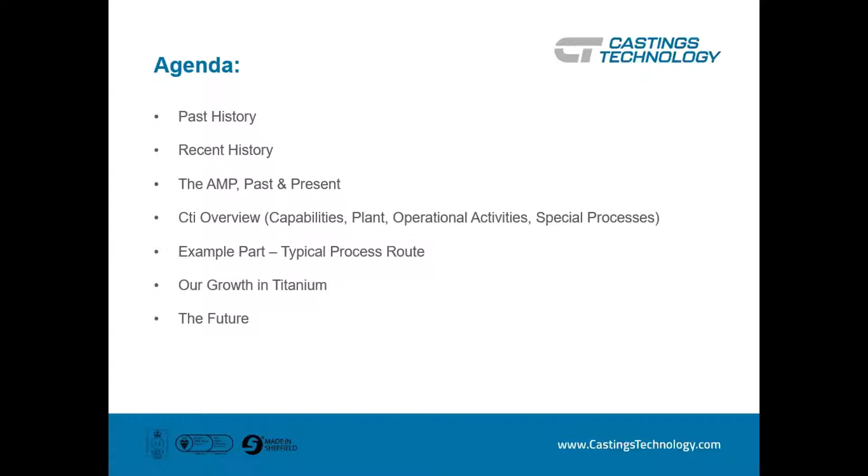Good evening, everybody. I'd just like to say to the organisation, thank you very much for the invitation. I've been asked to talk about Castings Technology International, a company that has a rich heritage, past, present, and future. We'll look at the past history, some more recent history, and then ultimately what we're doing at the moment, and what we hope to be doing in the future. I'll try and weave into that a little bit of discussion around the MBO process that took place in January of this year.

After both world wars, the government had a desire to promote and support the casting industry. After the First World War, cast iron in particular was a growing commodity, and the BCIRA was formed in 1923. Subsequently, after World War II, where steel was becoming much more prevalent, the Steel Casting Research and Trade Association was formed, otherwise known as SCRATA, in 1953.

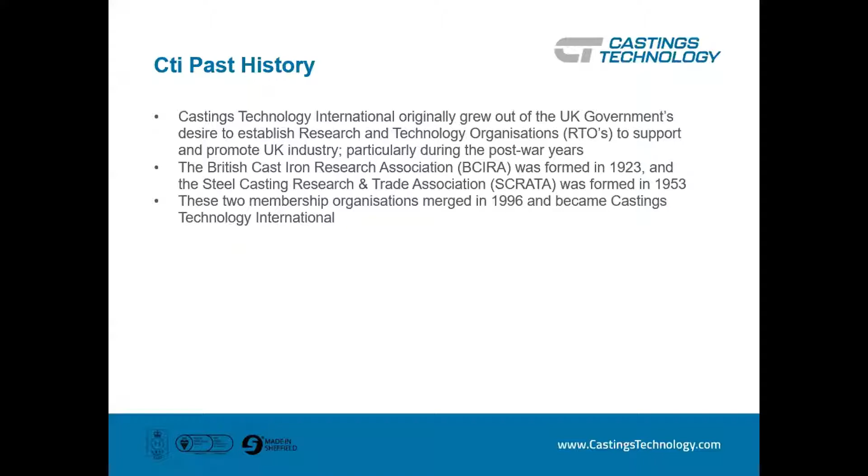Those two organisations ultimately merged together to form what became Castings Technology International. In 2006, the majority of CTI, as I'll use the acronym, moved to the Advanced Manufacturing Park at Catcliffe. For those of you who aren't local, I suspect most of you are, that's near Morrison's, just off the Sheffield Parkway, which is how it tends to get routed in the absence of sat-nav.

So when I say the majority of the operations, there was a subsequent move, which I'll come to in a second. But in August of 2013, the AMRC, or Advanced Manufacturing Research Centre, was pursuing three particular threads of manufacturing. Their expertise was in subtractive manufacturing, so what we would call machining as engineers. I'll come clean now and say all of my background is machining, so if the metallurgists would go really easy on me tonight, I'd be grateful.

I only really got to explore the world of castings from about 2014 when I joined the business. So in July, August 2013, the University of Sheffield bought CTI, and they did that because the next natural progression from subtractive processes like machining is to get near net shape, particularly when it comes to aircraft structural parts, where you might start with a block of aluminium of significant weight and turn 90% of it into swarf to create a matrix for a wing or fuselage section. They got very, very good at the machining side.

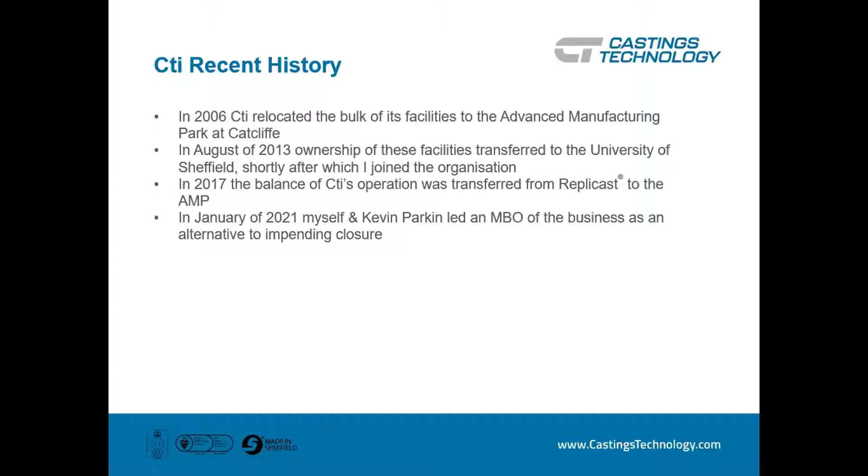At this stage, I always like to pause and reflect on us moving up to the Advanced Manufacturing Park and what that really means to the local region. As a regular visitor to the Sheffield area as a youngster, even though I'm a Midlander, more specifically God's County of Leicestershire, it always amazes me what the landscape looked like around Orgreave and Catcliffe at that period in time. This is just after the coking plant had closed and become slightly derelict.

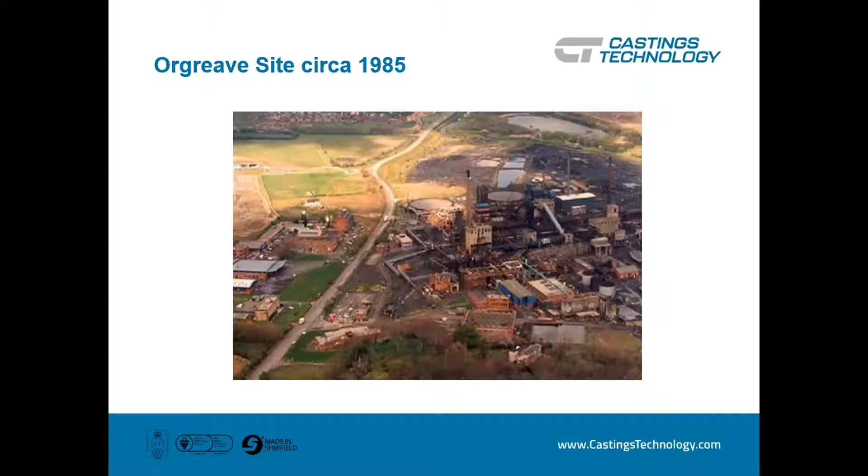And then in contrast with that, just a few short decades later - this is an artist's impression back in 2018, and nearly all of this has happened in that time scale. You'll see our two buildings just beside the very large windmill there. I'm sure there's a pointer, but I'll use my finger - that's our number 1 building, and that's our number 2 building.

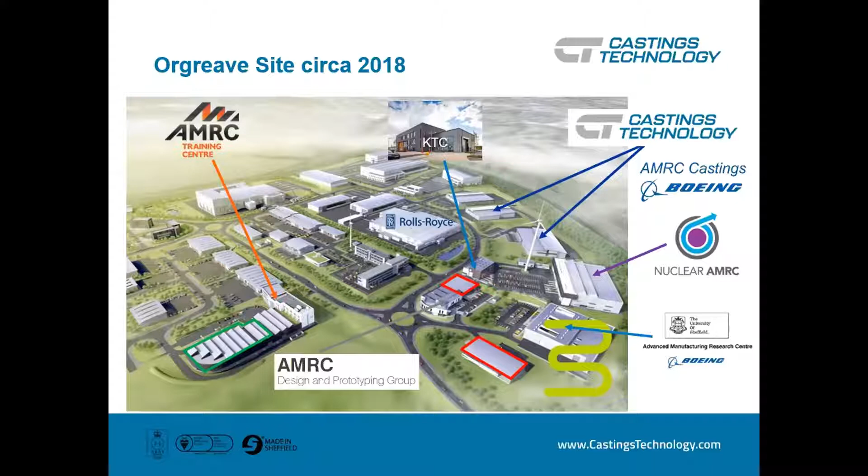It's not recent enough to have McLaren on there, which is just around the corner, and some great names including Rolls-Royce and so on. Just across the other side of the parkway, we attracted Boeing's only manufacturing facility outside of North America as well. So the transformation created by the Advanced Manufacturing Park is tremendous, and it's great to be on there, I have to say.

So what about CTI? I'm just going to give you a brief overview, then hone down into some of the processes. We have around 80 highly qualified engineers, ranging from very skilled operators through to people doing administrative support tasks and engineering in the background.

And we have, for a relatively small business, a very large global footprint. We have a licensee who has exclusivity in China, and a licensee who has exclusivity in India. We also have members throughout the world, and at the moment we're partnering with about 115 members. So we still retain that members feel to the organization, even though commercially we've branched out from that.

The reason I put up the graphic about MRL, TRL - a popular Department of Defense rationalization of manufacturing processes - is that what set us apart within the AMRC when we were still part of the university is that they focus very heavily in 1 to 6, getting to pre-production is where their expertise is. However, CTI go throughout the entire range from 1 to 9. So we can do blue sky R&D, development of new alloys and so on, all the way through to going into established processes in large foundries and optimizing the process further.

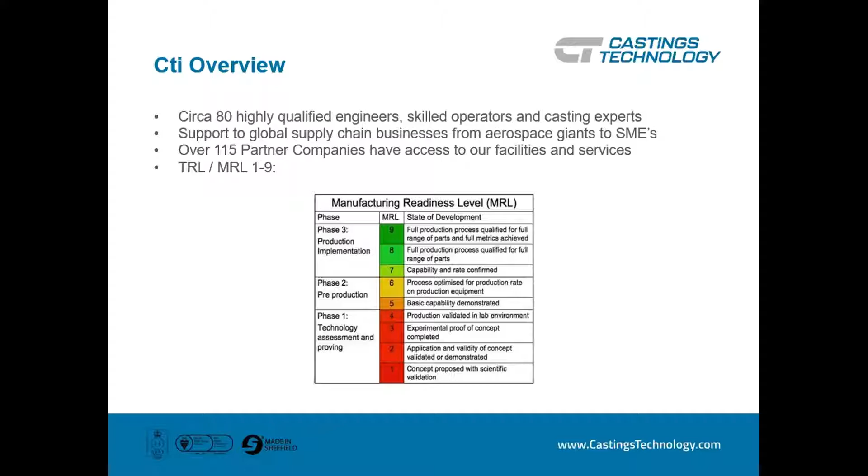So we do a broad range of services. In terms of what we do in the building, plant and equipment, I'm not going to go through this line by line because you're quite capable of reading it off the slide. But I think the important thing is we still use traditional pattern making skills. We have guys every day making patterns using wood, foam, generally low melting point materials for the patterns, but then an awful lot of wood for the feeding and gating systems and so on. The materials are obviously selected to suit the most appropriate ones for the process.

We're going to focus this presentation around ceramic shell casting. So ceramic shell manufacture is probably one of our most critical processes. We also have heat treatment furnaces, melting furnaces - so we have the whole gambit. We have quite a high level of vertical integration, so we don't have to subcontract too much work out.

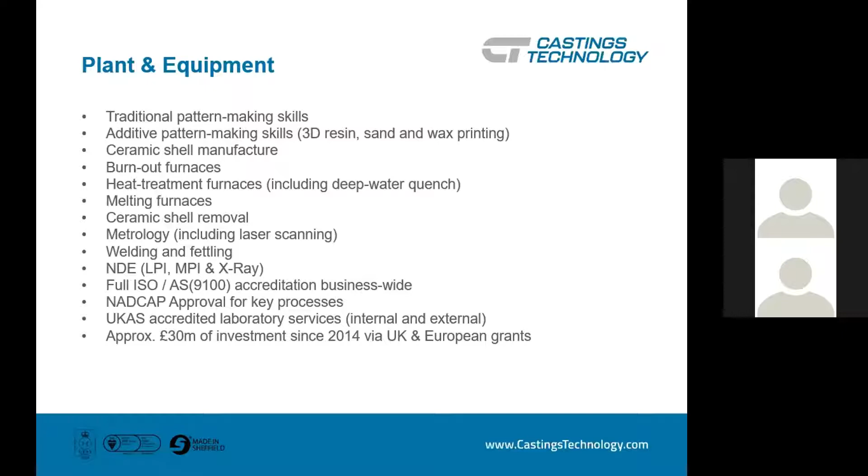The exceptions being chemical milling, which is a pretty unpleasant process that we don't really want on site, involving neat hydrofluoric acid, and also hipping - hot isostatic pressing - for which the capital requirements are huge, and we don't have the space for a hip vessel unfortunately. But as you can see, we've got a whole host of both traditional foundry practices and also some less traditional ones. Some great approvals there too.

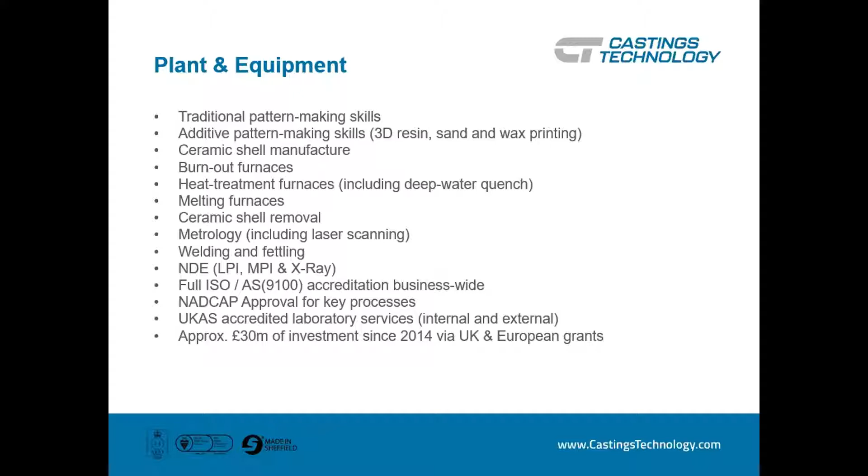We have a full ISO and AS 9100 accreditation. On key processes we also have NADCAP approval, and our lab is UKAS accredited. I think it's quite important to take in that last line - between the university taking ownership of CTI in August of 2013 and the MBO, there was an investment of around £30 million of public money into the business, into the facilities and equipment, and some of that you'll see in photographic form in the presentation.

So, some of our activities - we'll come back to the breadth of what we offer. We do make castings; we quite like making castings, and we like to think we're quite good at it. But we're not precious about casting, because there are other services we can offer that are good for UK PLC in particular, but also for overseas advancement of casting technologies. So we offer consultancy, we offer design for casting manufacture support, and a whole host of other things in addition to series production of castings.

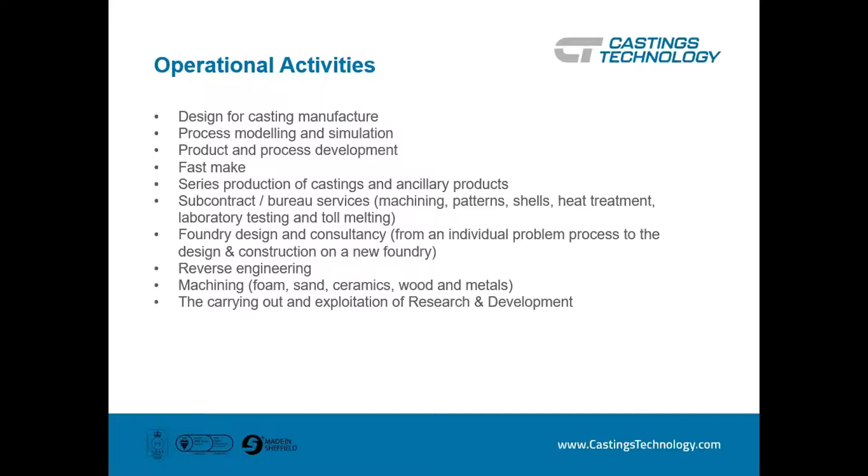And as I mentioned, all the way through the gamut from carrying out research and development, the important thing for us as a business is we can exploit it. It's not just about doing some research and development that sits as a paper somewhere, all very nice. What we can do is take it to market as well. That's one of the key reasons we stayed with the AMRC for so long. So these things tend to set us apart.

I've already mentioned the breadth of offering. We also have 3 primary casting processes within the facilities. One, investment, and the reason I put an asterisk by investment is, for the purists, we don't do investment casting, because investment casting goes into a hot ceramic shell, and everything we do pretty much goes into a cold ceramic shell. And when I say cold shell, usually the next question I get is, you don't really mean cold, do you? You have a heater on, it'll be a few hundred degrees. No, we mean room temperature cold, and that goes for titanium as well as the other metals that we melt. We have, unusually for a foundry, a whole wide range of materials.

We're the UK's only titanium foundry, but we also melt aluminium. We do all the steels through stainless to super duplex. We occasionally do iron. One of the few materials we don't do is magnesium, we subcontract that out. But whether it's light alloys, nickel-based alloys, titanium, we cover a wide range of materials.

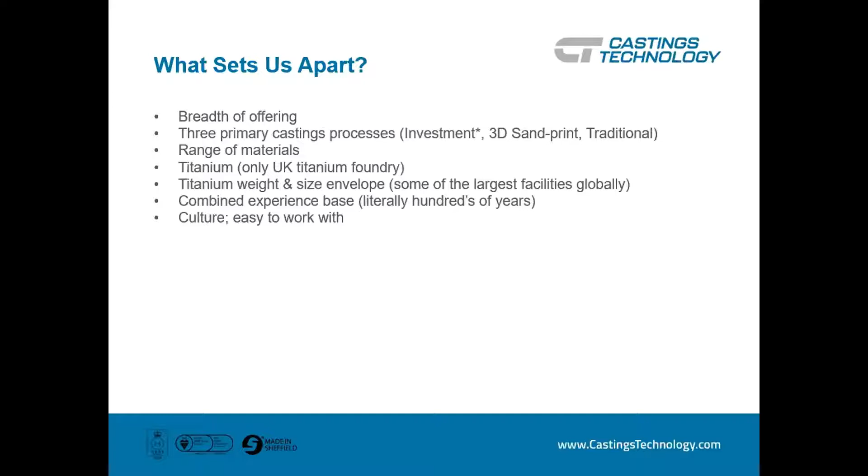You might think the last bullet point is a bit of an odd thing to say. We have a culture that we're quite easy to work with. Strangely, in the foundry sector, being easy to work with is not a primary concern of a lot of the foundries I've come into contact with, and certainly not when it comes to high-end titanium, which is generally controlled by 2 or 3 North American companies. So we set ourselves apart to be very, very easy to work with.

As you can see, our process generally uses a single pattern. In a normal traditional pattern process, you'll have a wooden pattern, ram sand, press that shape in, and you'll probably have a core box and be fitting numerous parts in. With every one of those parts, there's an accumulation of tolerance and so on. We don't have any of that. We print the pattern, usually in 3D, or machine it in foam, and it's a single piece. Why that's important we'll come back to a bit later on, but what I'd like us to think about is it's not just the accuracy of that part in terms of tolerancing, it's the geometrical relationship between those vanes that's consistent, very accurate, and the blade form's very good.

So it wouldn't be the first time that people have bought impellers using old empirical data that have broken the pump casing because it's over pressurizing the pump case. It really does change the hydrodynamic performance of rotating parts.

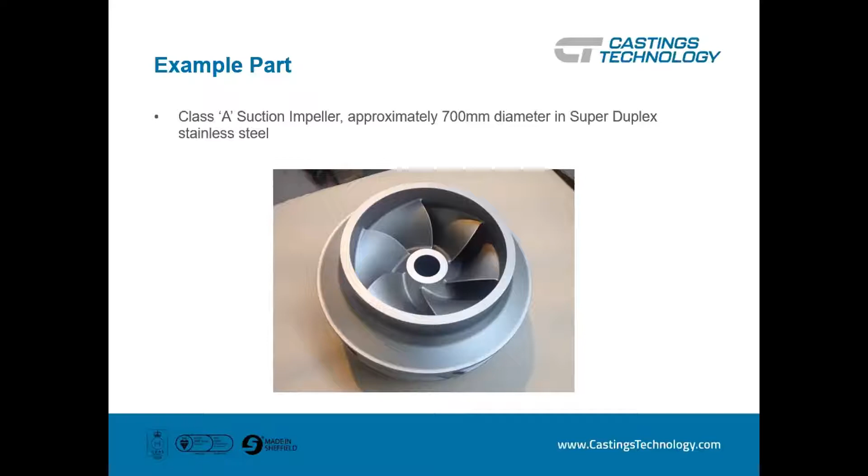So this is the part that we're going to run through in terms of some of the things we do. That's what they look like when they've been finished, machined. As you can see, a lot of these parts that you saw on the other picture, looking around the periphery, are as cast. It's just the outer surfaces where it has to mate with other parts that are machined.

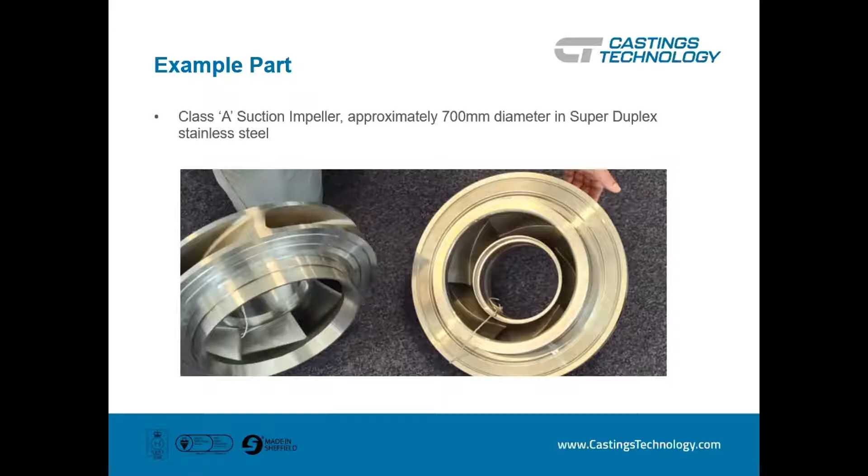So we utilize 3D solid modeling, as a lot of companies do nowadays. We don't generally get involved in physically designing a product from scratch. What we do often get involved with is consultancy on design for casting manufacture. Because of casting's legacy, there's probably a whole generation of engineers who've come through and been told that casting's a bit suboptimal as a process, which is slightly unfair, particularly given the advances. But there's still a tendency to design with a machining or fabrication mindset.

And what we do need sometimes to discuss with the design authority is what sort of corner radii. If we can increase the corner radii, we reduce the opportunity for a crack, and so on and so forth. Very basic stuff, offsetting webs so that we don't create an isolation in the design. And using 3D modeling for that is a real bonus.

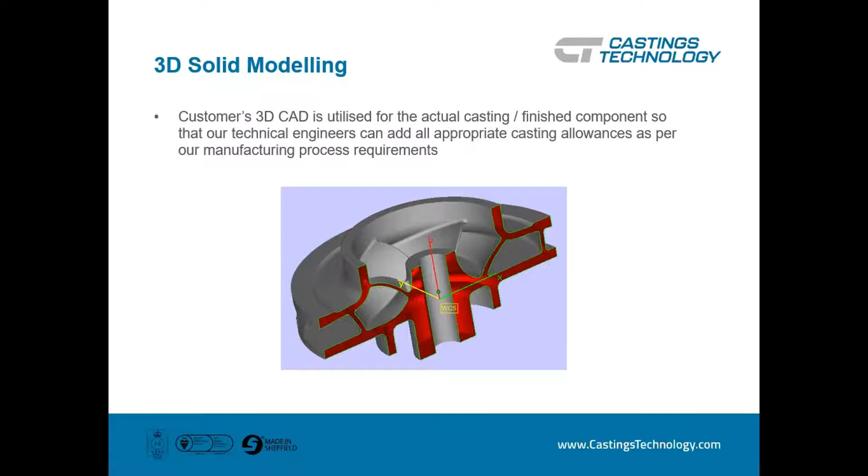I would say 90% of what we do these days comes to us first as an inquiry with a 3D model. Then what we do, we often make one-offs in small quantities. Now, I don't know about any of you guys, but I did my apprenticeship being told that unless you've got 1,000 to make, don't even consider casting as a process. But we do an awful lot of one-offs. Our average batch size will be around 2 or 3.

And even where we do volume, we've got a contract on F-35, the Joint Strike Fighter at the moment, and we're making 40 parts a month for that, but there are 9 part numbers, so it's still relatively low volume for each individual component. But what we do have to do when we have so few parts to go at...

...is to do as much upfront simulation in the digital world as we can. So all of the castings we make have a full process simulation carried out, sometimes prior to quotation. It really depends on the type of part. And we'll almost always run a fill and solidification simulation as well. It's surprisingly accurate. We wish that we could go one step further and model the shell as well for its dilation and propensity to crack, but unfortunately that technology doesn't exist at the moment.

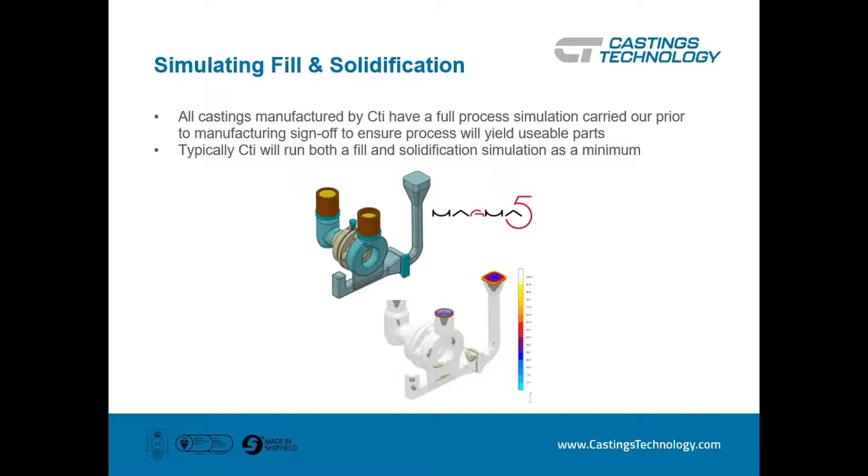Then what we're going to do, depending on the geometry of the part - and this very much suits the photograph that I put up at the beginning - we're going to make a pattern or a replica, hence Replicast, of the part that we want to make. And that's very traditional in investment casting.

But what we do need is a good low melting point material that's going to give us a reasonable surface finish. So foam tends to be entry level. We machine foam. Some of the limitations of foam are surface finish, although we can wax the outside to help with that. But also, remember, we're machining foam, so we can only make shapes that you can machine on a multi-axis machining center.

Whereas with SLA, we're building these patterns in layers, and these are known as quick cast patterns. And if you don't know...

It's Yorkshire, the resin's expensive, so we don't like to use very much of it. But joking apart, what happens is if we create this in a solid resin, put it in a ceramic shell, and then try and fire it to burn it out in an oven, the first thing it will do is expand, and that cracks the shell.

So what we actually create here, although it looks solid, inside is a honeycomb pattern. That reduces the amount of resin that we use. It also, when that's exposed to 1,000 Celsius, tends to crumple in on itself. There's lots and lots of trapped oxygen, and it helps to burn it out. We don't want any ash or waste left in there. And that allows us to create a really good replica of the part with a little bit of contraction allowance on it.

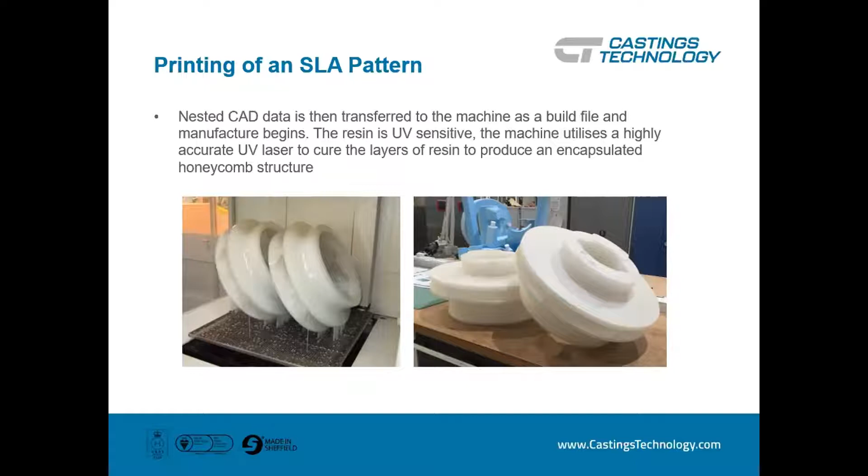So that is our go-to process for low volume, high integrity Class A impellers. It's a very expensive process, by the way, but very, very good at what it does.

Having done that, we're going to put that in a cage - whether it's SLA, foam or wax, whatever the low melting point replica is made of, they are quite fragile. Then we're going to add ceramic to it, which is not known for its robustness and toughness. So we put everything into a standard cage. We have a range of standard cage sizes, and we're going to create that ceramic shell.

That's made up of a number of layers, alternating between wet ceramic slurry and dry granulate ceramic. In between each of those coats, there's a drying cycle - not firing anything, it's literally about 25 Celsius, a warm, low humidity environment. Because what we want to do is avoid any wetting back. You put a wet coat onto some plaster or ceramic and it's likely to soak in.

We want to draw the water out, so that's relatively low temperature. And that might be up to 30 coats. It all depends on the material type and the geometry.

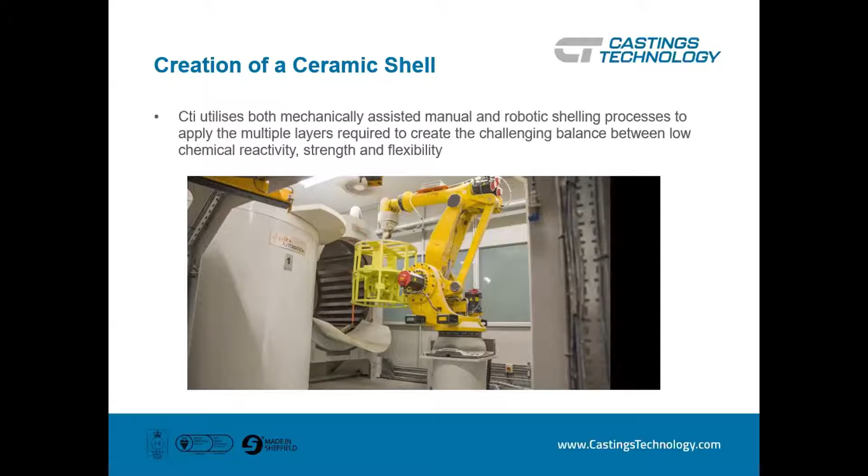And that leaves us eventually with a ceramic shell that looks a little like this. This is the best photograph I could get today because the only thing I was missing was the shell. It's had a section cut out of it, but you get the general idea of the relative thickness of the ceramic, and balancing that, as I'll mention in a moment, is really, really important.

The reason that's blue inside is that the prime coat, which is the first coat you put on the model, is the most important one. It's the most expensive - it's the KFC recipe that nobody gets to know about, because that's where all the technology is. That's the coat that's going to see the incoming metal stream, which is going to be significantly hotter and heavier, as it splashes into the shell.

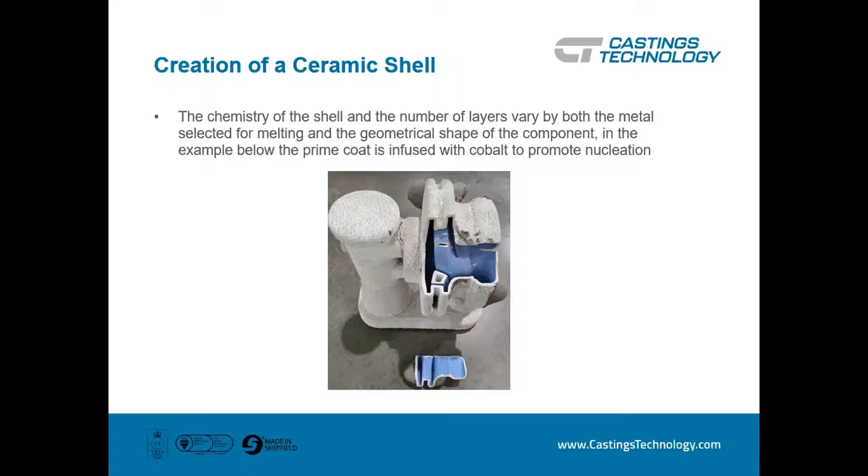This particular one is blue because it has cobalt in it. Cobalt helps to promote nucleation on certain materials, but it gives you an idea of what a ceramic shell actually looks like. And then we're going to melt and pour.

In this case, I picked on atmospheric melting because the part, as described, is super duplex. We melt that generally in atmosphere, depending on the specification. And we have a relatively modest melting capacity for steel. We have 3 furnaces, so we're able to make a range of parts without melting too much material.

They're on a single electrical track, so we can melt all 3 at the same time and create around about 3 tons of molten material. Now, because our yield using this process is relatively low, that will give us a finished casting of around a ton and a quarter, something like that. The rest of that material is part of the process - it gets cut off, it goes back into the process and gets recycled, like most metals do, but the yield is relatively low on this process.

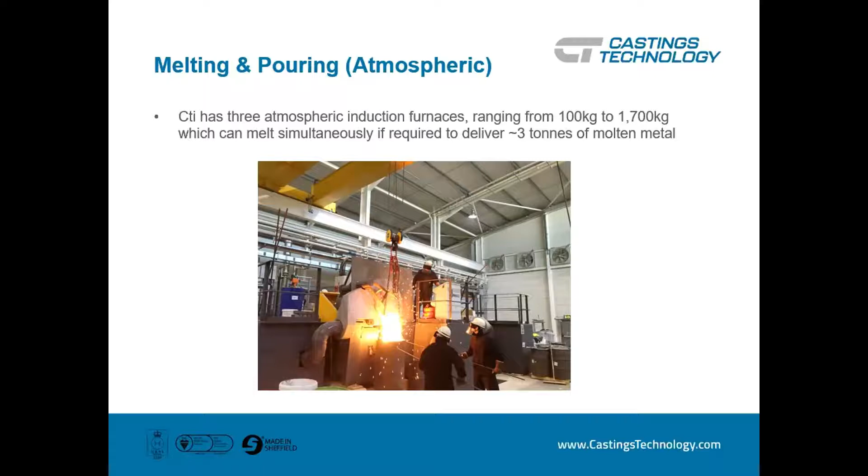And then you may well ask yourself, well, that ceramic shell is at room temperature. We're bringing steel into it probably around 1600, somewhere depending on the spec, 15 to 1600 Celsius. We're going to bring it down in a down sprue. We're going to fill that ceramic shell quite quickly - 25, 30 seconds - with maybe up to 3 tons of molten metal, and you're going to elevate its temperature almost instantaneously to around 1600 Celsius.

And it would be naive to expect the shell to survive that on its own. So outlined on this particular photo is the Replicast box down at the bottom here, and you'll see a number of vents and also the down sprue. What we do there is we put the shell in its entirety inside a steel box. We surround it with standard silica sand, nothing special about the sand.

What is special about the process is we then put a sheet of plastic across the top. We connect the box to a liquid ring vacuum pump. And if you've never done this experiment, if you do that, you find that the sand solidifies. So I missed out an operation which is vibrating the sand - we keep settling it like you would with a salt pot. And when it's settled to a certain frequency and time, we then pull a vacuum through it. We used to do it at exhibitions, actually, with a sword in the sand.

People will come along, pull it out, put it in. If you pull a vacuum over the sand, you cannot get that sword out of the sand. So what does that do? Well, you can imagine at the grain of sand level, every small part of that ceramic shell is supported.

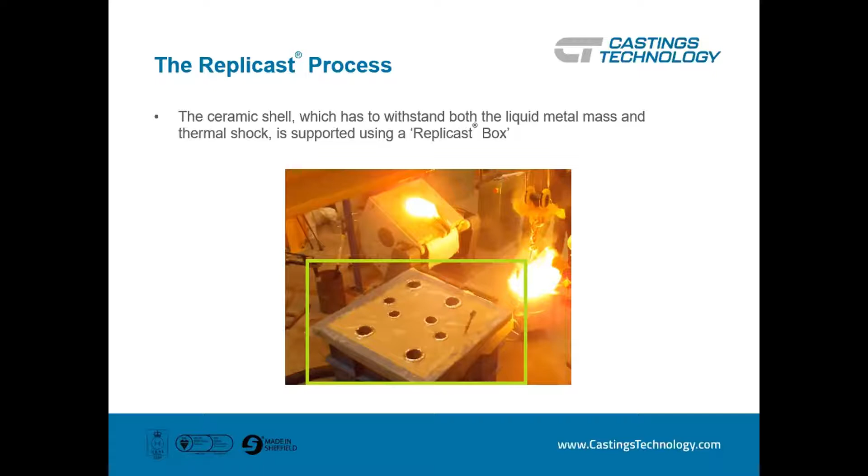So that's the Replicast process that produces the main number of our impellers. And then, as most foundries have, we have a range of NDE equipment, including LPI, MPI, and X-ray.

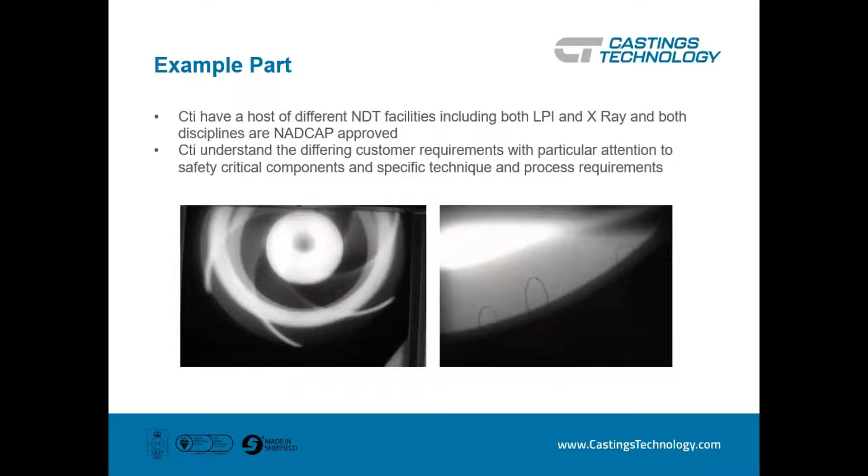And again, you'll see that's a suction impeller there with some defects identified. Those defects might be in the form of an inclusion or a crack, and depending on the specification, that's assessed, and a repair is carried out, usually a grind out and a weld repair, and then it's retested to make sure that it meets specification.

What we should end up with is something with a very fine surface finish and good geometrical relationship, which is really what we're after, much more than just accuracy, and that leads to that excellent hydrodynamic balance and pumping performance that I mentioned. Cavitation is a real problem on rotating equipment, and if you can avoid it, then you eliminate a lot of wear potential, but also noise in the process, and premature wear to upstream and downstream processes as well.

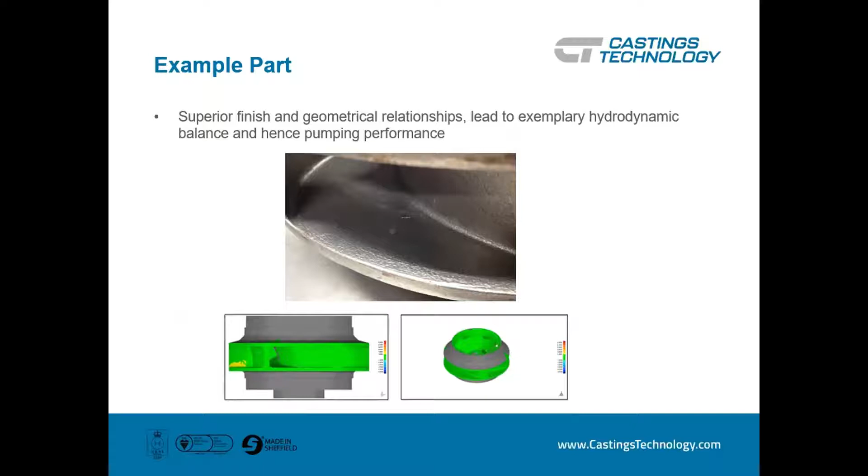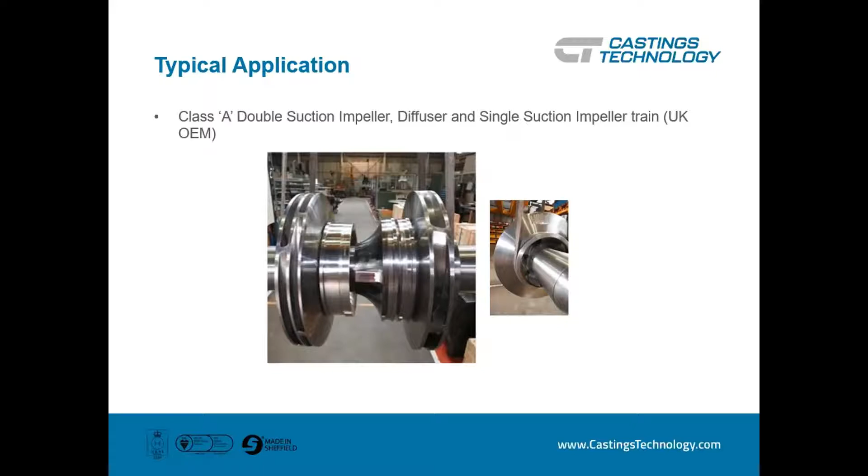If you've ever seen a very high performance pump, they tend to have lots of these in a long train, pumping all sorts of materials, particularly some very difficult to process materials, which sometimes involve coating the casting, or alternatively going up the material scale. So in some cases they go to titanium for corrosion protection, other times nickel-based alloys for particular acids, and so on. It just depends on the application.

I mentioned titanium, so I'm going to talk about that in the investment cast sense, because most of the titanium casting we do is through the investment process. We all know titanium is a very versatile material, quite expensive, but it's generally been the preserve of aerospace.

Certainly in the forces, we're involved quite heavily at the moment with the Navy and the Army, who want some titanium action, because Biggles has had it all these years and they want a bit. I joke, but it might surprise you that the Ministry of Defence are estimated to spend £1 million a day alone on corrosion, repairing or replacing parts that have corroded in service. So titanium is quite high on their agenda at the moment.

I've mentioned previously, we are the UK's only titanium foundry. And the thing about titanium is it's very inert, very strong, very light when it's solid. Like most materials, it doesn't like to be molten and wants to get back to its solid state as quickly as possible. The difference between titanium and other metals is, whilst it's in that molten state, it's highly, highly reactive.

That means we have to work very hard on the chemistry of our prime coat, the first coat that sees the metal as it comes in. We also have to avoid oxygen getting anywhere near it at all costs, and particularly water. Bearing in mind, we're still using cold shell technology, and there's only one other foundry in the world that we're aware of that's cast titanium into a cold shell.

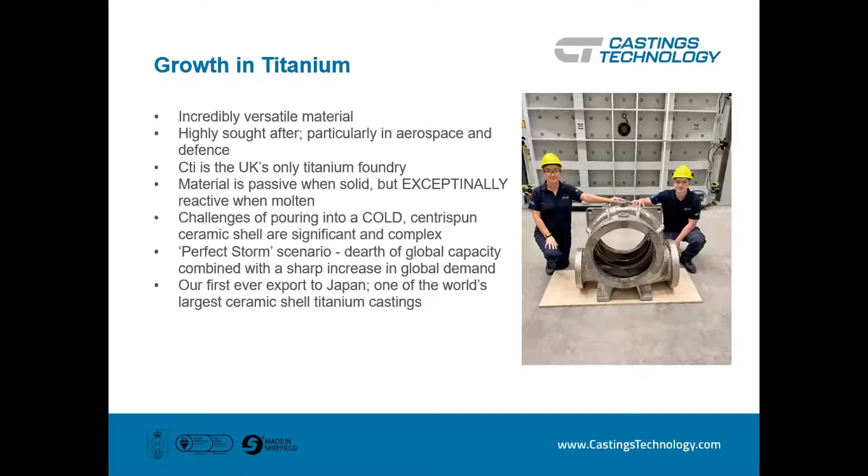Titanium's a distinctly different process. So up to this stage, if we were going to make that impeller I've shown you so far in titanium, all of the process up to this point would have been identical: make a pattern, make a ceramic shell, burn it out, and so on.

But with titanium, as I mentioned, it's very reactive, so we carry out the melting process under a very, very high vacuum. That's the case with everything we do with titanium—if we have to weld it or anything, it's all done under vacuum. We have a significant temperature delta between the crucible we're melting the titanium in, which is made out of copper, and the titanium itself—a differential of some 650 odd degrees or just under. So we have a lot of water cooling, which runs constantly around the copper crucible, goes outside to heat exchangers, and comes back in the building.

And all the while we're centrifugally spinning fairly fragile shells, which could weigh several hundred kilograms each, spinning at 20 G. So there's a lot going on when we're melting titanium. What we need to avoid at all costs is any water getting the wrong side of the copper. Because if that happens, you're elevating that water, probably at 4 or 5 degrees Celsius, to 1730 degrees instantaneously, which creates some expansion, shall we say. Then the titanium attaches itself to the oxygen, leaving the hydrogen atoms, which then ignite because of the temperature—so you get a bang, bang, steam, hydrogen explosion.

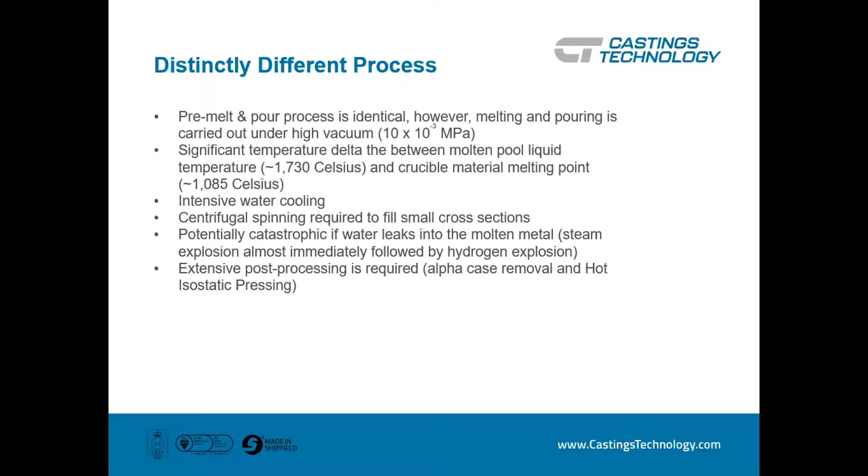The other thing we have to do on most parts, particularly if it's going on a plane, is get hot isostatic pressed. So we need to close up any potential internal voids. We would hope we wouldn't have many anyway, but we would need to try and heal those, which the hipping process does and densifies the material from its as-cast form.

So what basically happens is it's vacuum arc remelting, which starts with an electrode as its starting stock, unlike most of our other materials, which start as scraps and offcuts. So we're starting with an electrode that is 2.2 meters long, 585 millimeters diameter, and it has a stub at the top that the crane can hold on to. That's a 40,000 pound ingot of titanium. We're going to pick it up using the hydraulic ram at the top and into a vacuum chamber, which is over the top of the melting chamber.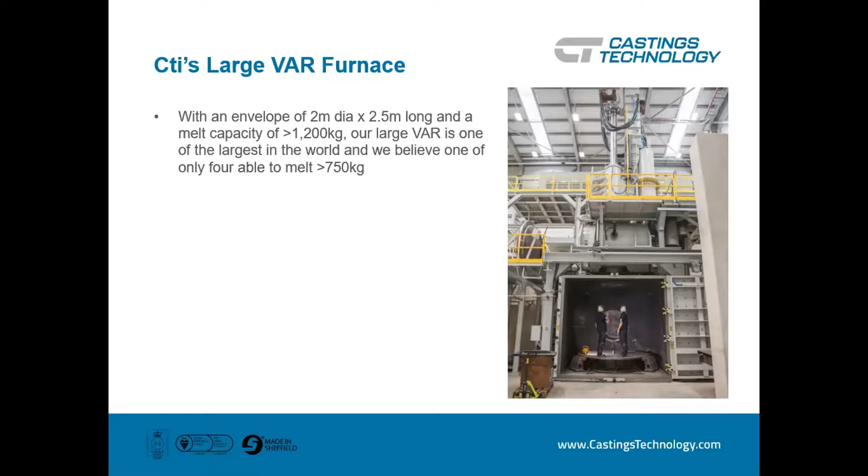It's worth just pointing out, it says in the text there that there are probably 4 furnaces in the world over 750 kilo melt weight. One of those is in Belgium, one is in North America. There's probably one in Russia as well, which is very big, but they only melt into graphite molds. So we're in exclusive territory with the VAR furnace.

So that's where we've been a long time ago, where we were in recent history, and what we're doing at the moment. I guess the next natural question is, what are we doing next?

I'd have to probably review my restrictive covenants to tell you what I'd like to tell you about the MBO, so we maybe do that when it's not being recorded.

But let's just say there was a preoccupation with winding the business down and closing it rather than taking an alternative route, and I'm pleased to say that we managed to defy the odds. We saved, at the time, 75 jobs, got 80 staff now. And also, a little bit like Forgemasters, which has just been taken into government ownership, we kept a sovereign capability open for the UK defence and aerospace sector.

So really, really important. However, that was really the easy bit, didn't seem so at the time. What we do need to do is keep the business sustainable with rising costs and all of the other things that challenge businesses all around the world.

So the key to our growth is volume, having sufficient volume to be able to make castings profitably, which is not perhaps as simple as it might seem. Part of the reason for that is we're very niche. So I showed you that very pretty impeller, which is probably nicer than you'll get from any other foundry anywhere else in the world. But if it doesn't matter if it's pretty or not, nobody's going to buy it because it's going to be more expensive than a less pretty one.

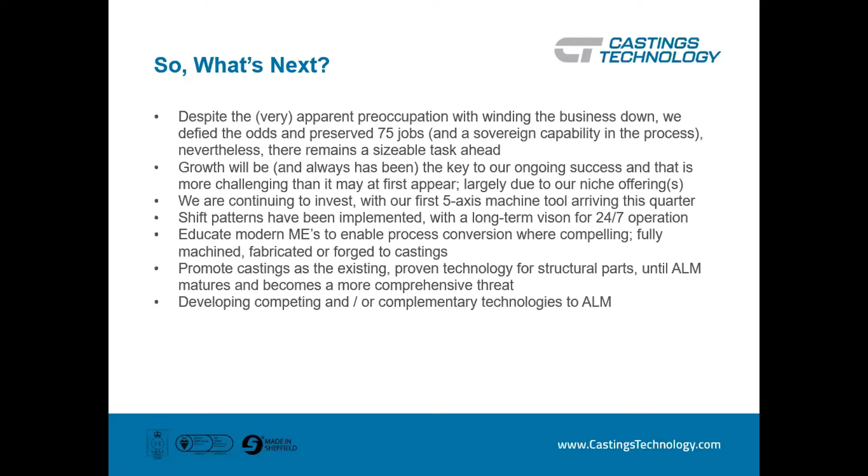So rather than being against ALM, we recognise some of its shortfalls. We're able to overcome some of those, but we're also looking to develop complementary technologies, and who knows, we may even embrace ALM ourselves at a future point. So we shall see. That's all I've got to say.

I hope it wasn't death by PowerPoint. Anybody got any questions?

Does your process offer an advantage in terms of grain structure or the microstructure and grain flow? It's a very interesting area. With a cold shell versus a hot shell, where the titanium takes longer to cool down, sometimes a lot longer, you get increased grain growth during that phase, and that's what we want to avoid. That's the extent of my cold shell titanium casting knowledge.

Sorry if that doesn't quite answer your question, but what we do see is that our properties are demonstrably better than castings produced using the hot shell process in mechanical properties terms. In particular, the key thing for aerospace users with titanium castings is fracture toughness, because that's where you struggle against forgings. Our fracture toughness levels are extremely good in comparison to forgings.

It is interesting - I've seen some forgings, particularly on the Eurofighter. They recently sold another batch of, I think, 75 Eurofighters, and we do a couple of parts for that. We got dragged up to Samlesbury to look at it, and they said we've got to take cost out - basically they'd sold them below the requisite margin. The reality is it's a legacy aircraft nobody wants to put a lot of resource into. But they were making a forging that holds the vertical stabilizer fin onto the fuselage.

It was crying out to be a near net shape, but they make it out of a forging because everyone thinks forgings are great. It's a lump of titanium, and then they machine most of it away, so any grain flow they did have has been quite severely cut. Then they weld it to another piece of titanium and create an awful lot of porosity because they haven't got the welding process right. I said I could produce that from a titanium casting for you with 1 millimeter machining all over - job done. But we'll never get that process changed through, and you begin to wonder why you bothered going all the way up to sunny Samlesbury, but there we go.